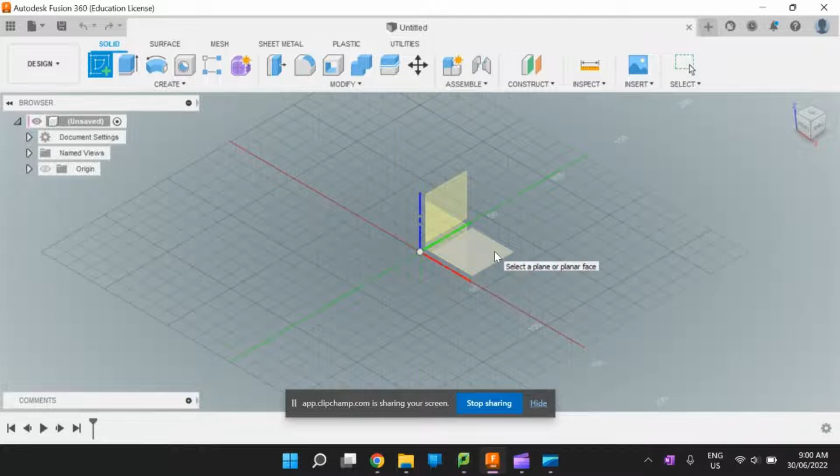The first consideration I need to be aware of is the size of the jigsaw I've made. I'm going to click on the new sketch icon, click on the base plane, bring it into 2D, and make my first piece 100 millimeters high by 160. This gives me the basic shape of my jigsaw puzzle.

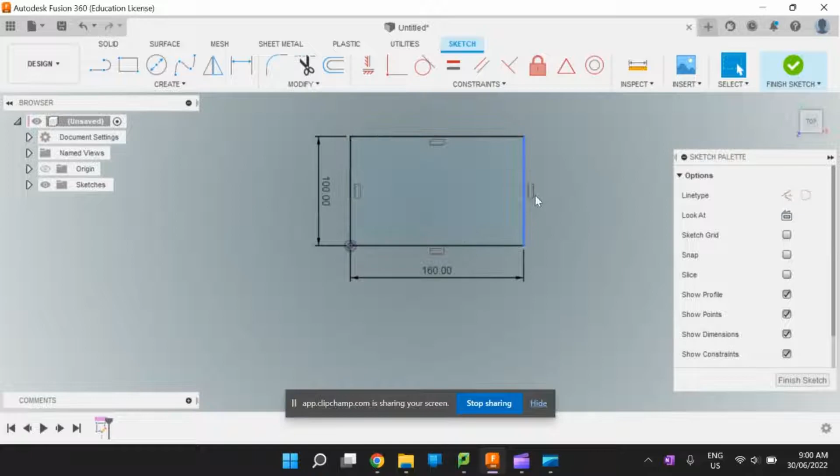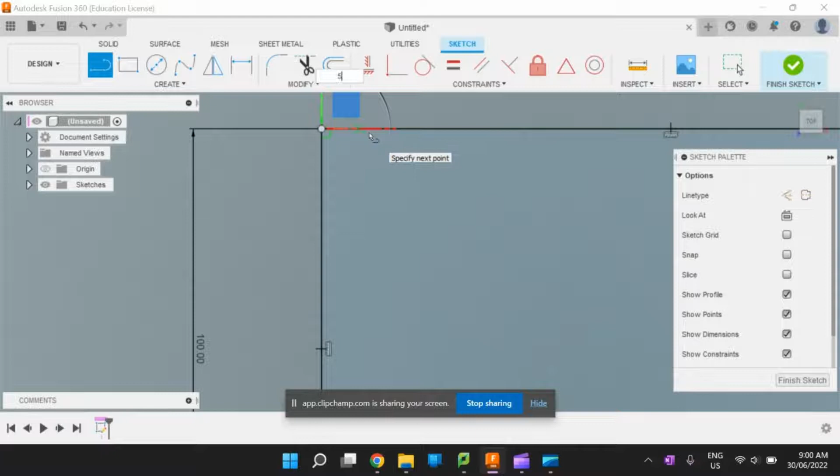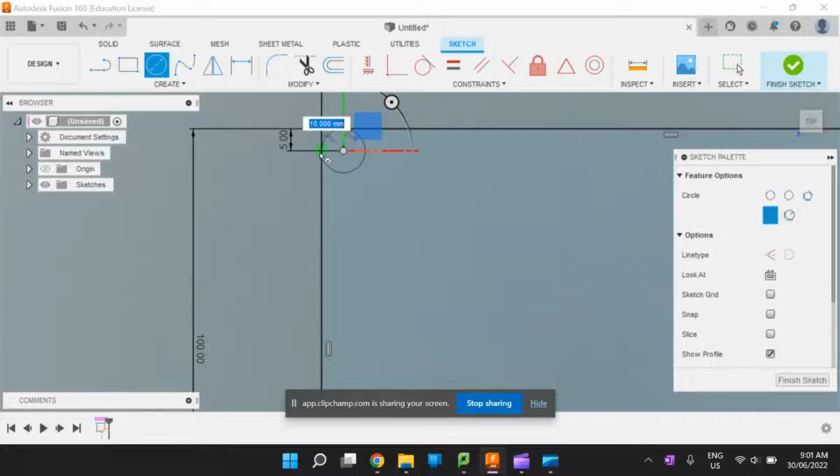If for whatever reason you had a rounded edge, like in the tutorial I showed you where there were rounded edges on the corners, you might want to do a rounded edge as well. I did a 5mm rounded edge, so I'd bring a line in 5, drop another line down 5, and then draw a circle. That should give me the shape I want, as you can see there.

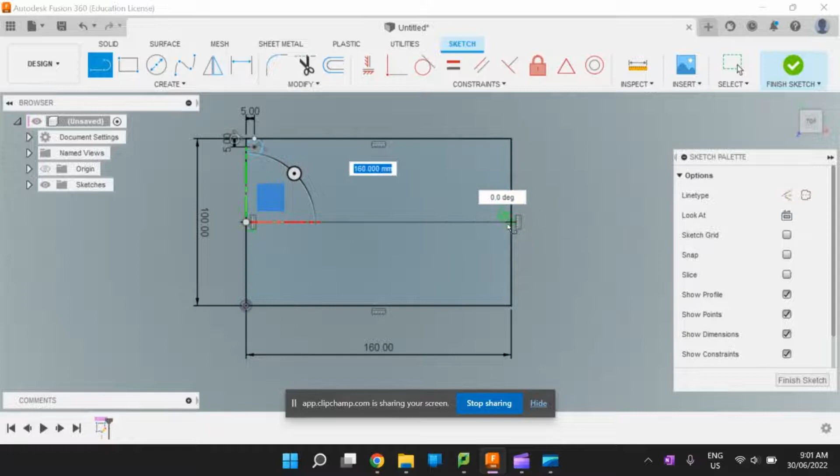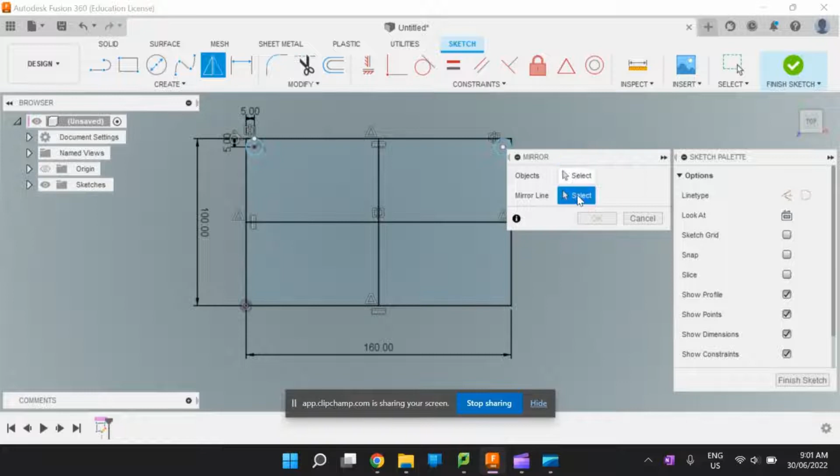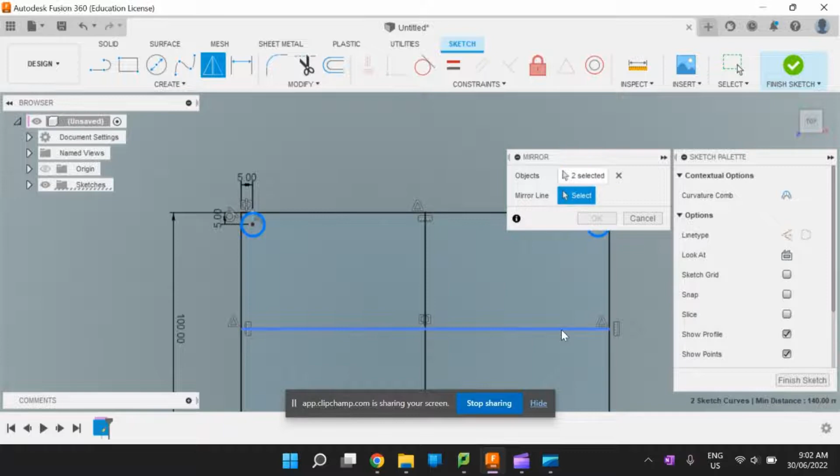To make life easier, I'm also going to mirror that same shape twice. I'll find the midpoint here and draw a line across, then find the midpoint here and draw a line down. Now I select my circle, click the mirror function, click this as my mirror line, click OK. Now with both circles highlighted, I click the mirror function again, select the mirror line, hold shift when highlighting so they go dark blue, and mirror to get 4 circles now. That gives me the basic shape I'm working with for this project.

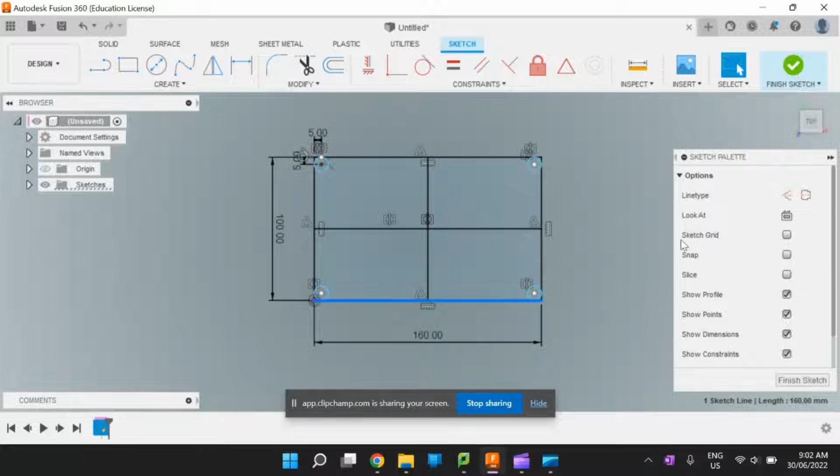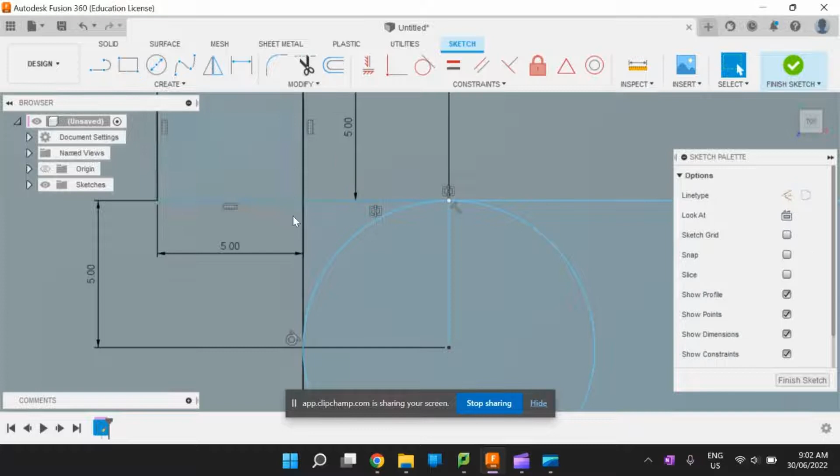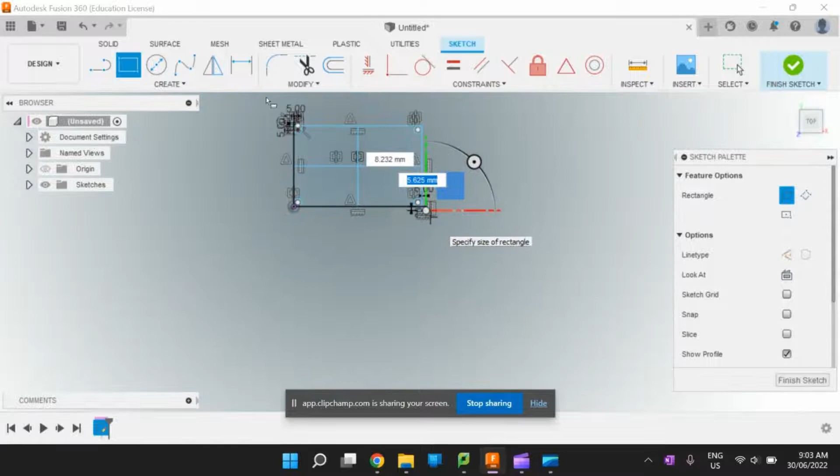Now you might want to tidy up your design. It's not super important, but I'm going to put a border around this shape. I'll delete these dimensions here and just add 5mm to the outside of this shape. The easiest way is to put a small box out there that's 5 by 5, and on the other corner create another small box that's 5 by 5. Just click on that outside corner, zoom out - sorry, it's freezing a little - and click on the outside of that corner too, then both are done.

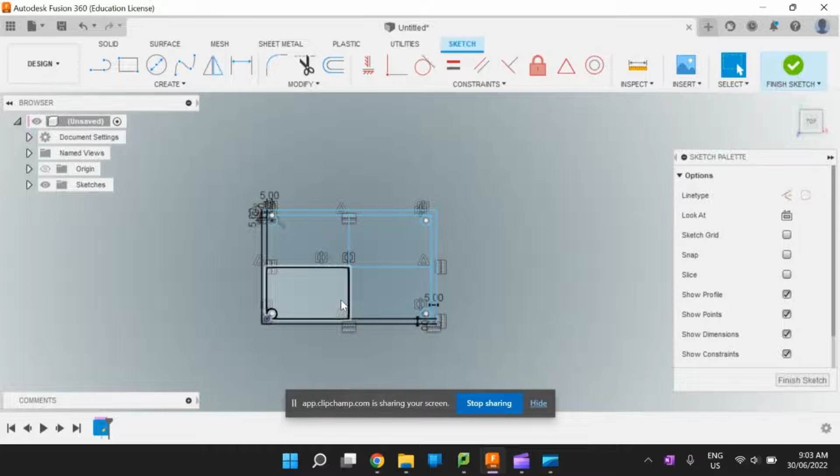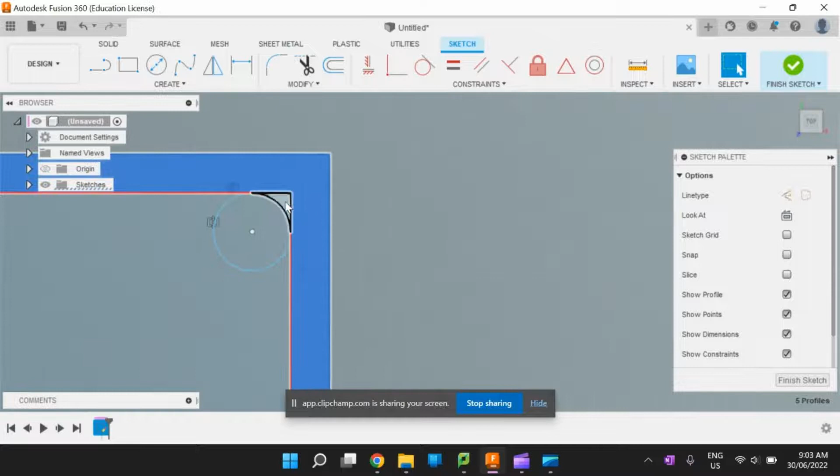Now I'm going to extrude this profile, but I'm going to do an extrusion below the line, and I'll show you what it looks like. I want to click the outside and get all of that shape, including the rounded edges. The only part I'm not highlighting is the shape the jigsaw puzzle is going to fit within. When I do an extrusion now, we'll see in a second what it's going to look like - solid extrude, we want to bring that up.

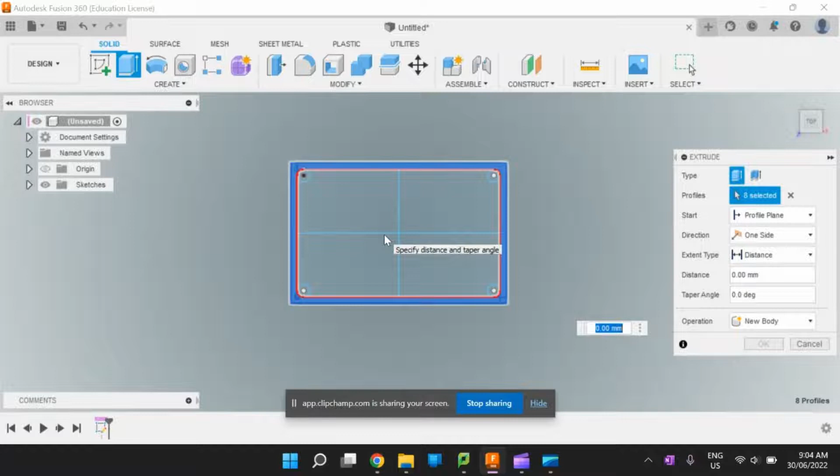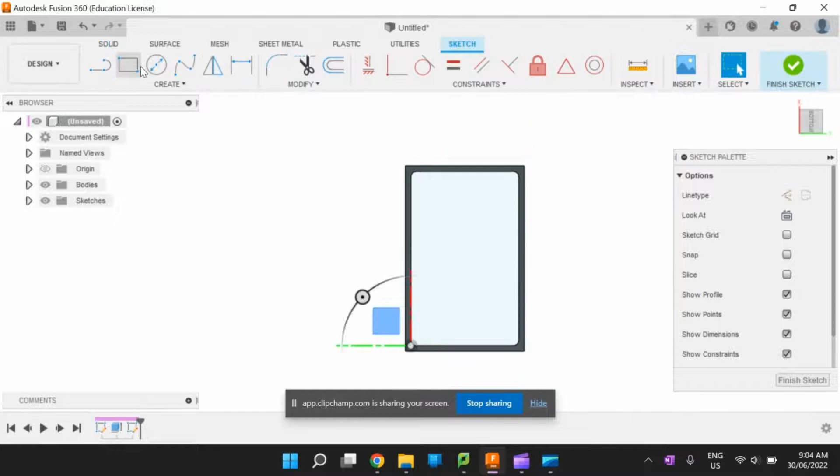The thickness of the timber for the jigsaw puzzle is 3 mil, so let's bring it up 6 millimeters, and then I've got the case like that. I will need to put a base on that, so I'll go underneath it, create a new sketch on this face, get the rectangle tool, and cover the base. Then to extrude that - solid extrude 3 millimeters. Now I've got that shape.

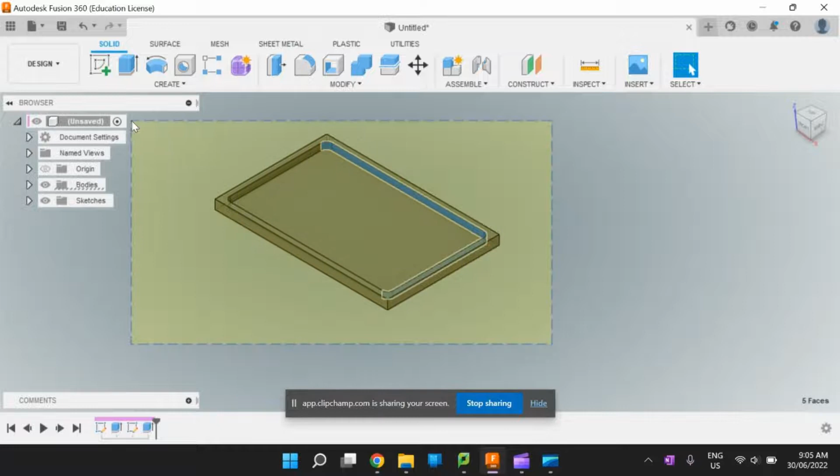I'm also going to highlight everything and move it up 3 mil so that it still sits on the 0 plane. Now I've got a basic shape for my jigsaw puzzle to fit within.

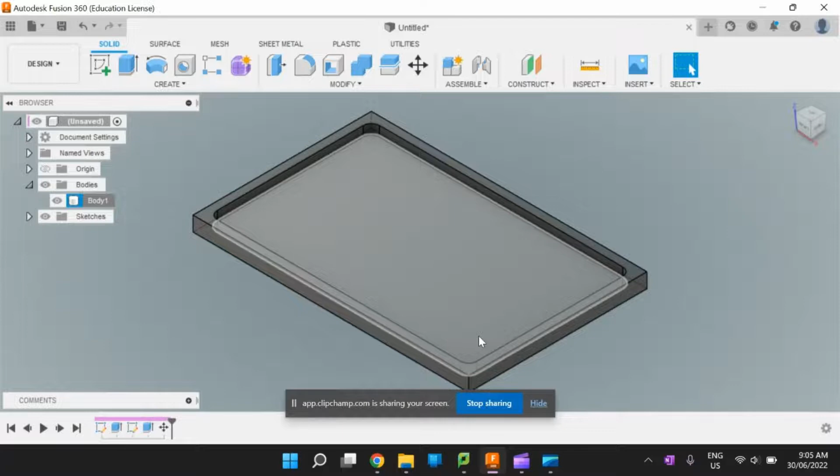The last thing we're going to do is put a little rebate in the top of our jigsaw puzzle so we can put a piece of Perspex over it as a protective coat. If we look at the shape we've got here, we've got a wall that should be 3 millimeters across - it's actually 5 millimeters across, which gives us a little bit of room.

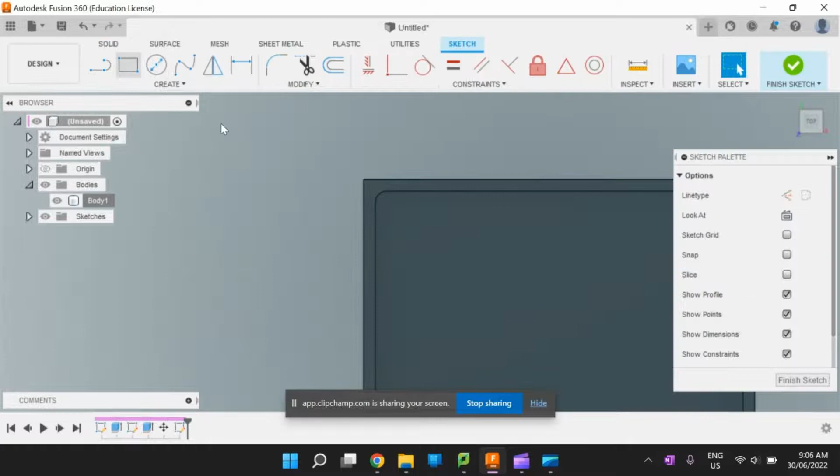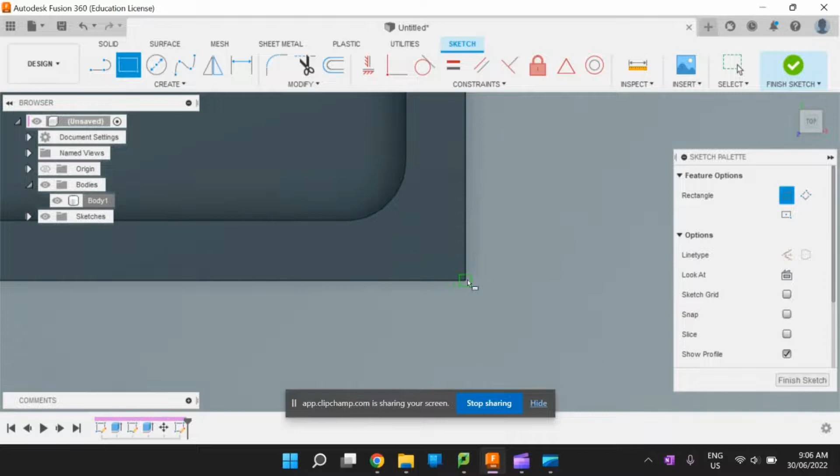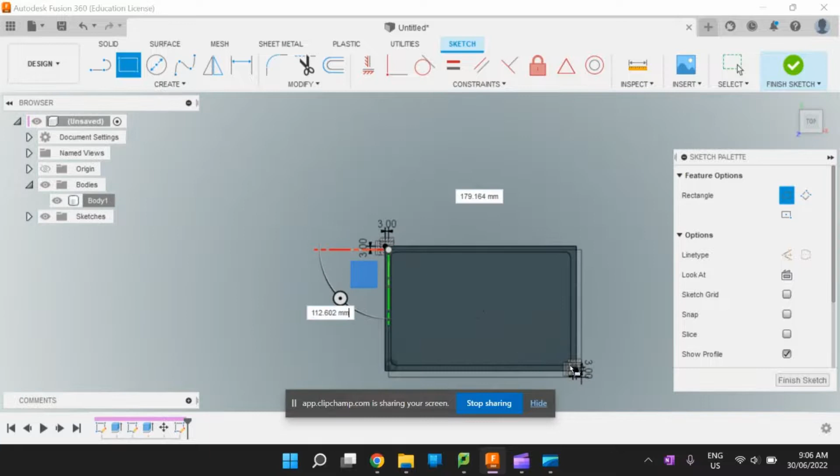So we're going to create a new sketch on this face and put a little square that's 3 millimeters by 3 millimeters. We'll do it on both corners and do the same thing as last time - 3 by 3, using the rectangle tool on the inside corner. It seems to be freezing when I'm doing the rectangle function, but it's snapped on there as well.

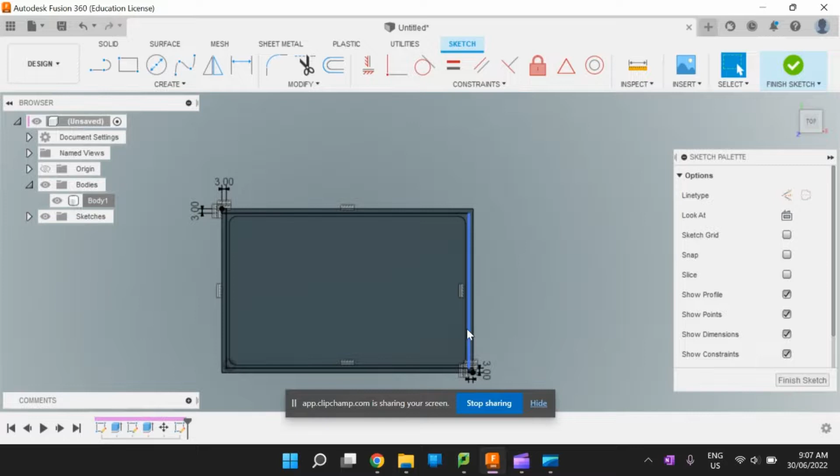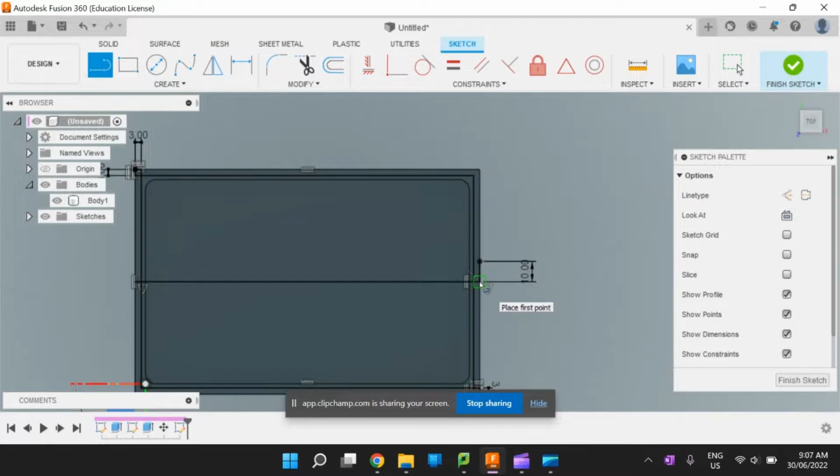Now I've got the shape in there that I can select. However, if I'm going to do a rebate, I'll also need somewhere for my fingers to lift up that piece of plastic from. So I'm going to draw a line from the midpoint all the way across, then lift that line 10 millimeters up and 10 millimeters down, and draw another line.

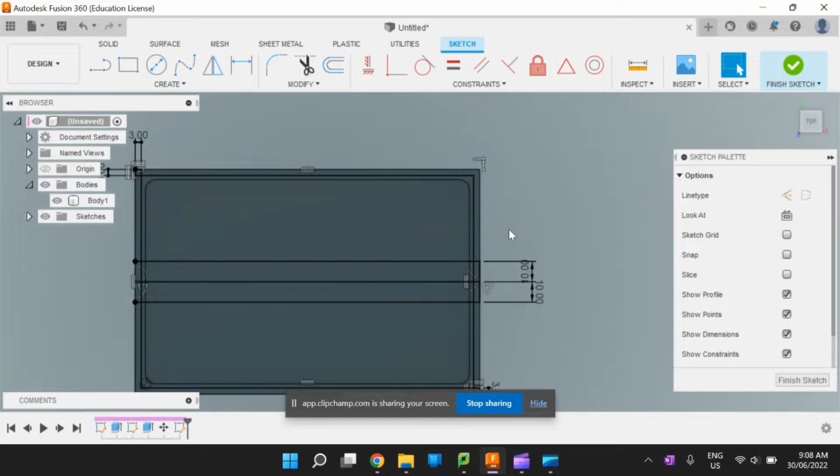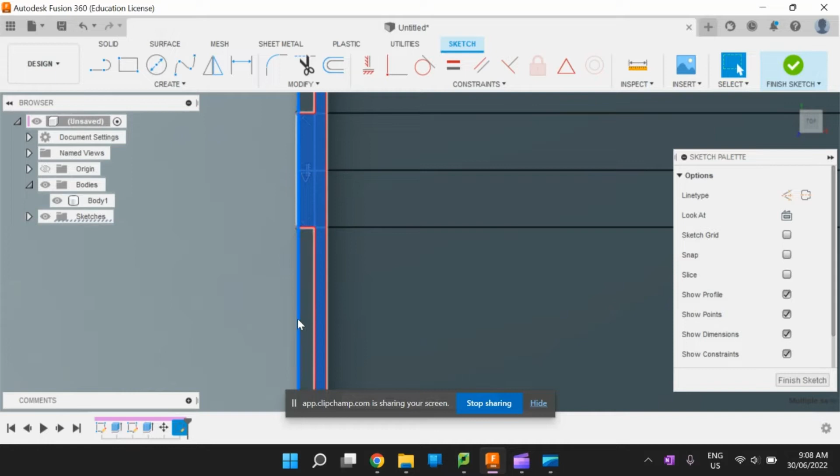Why would we do this? Because when we do our rebate, we're going to cut down the side wall a little bit as well, just so everything will fit in. So now I'm going to select this shape on the inside, click and select these walls here, but also click these two walls on the outside and do the same thing. You want something that looks like that, with everything on the inside for the rebate, plus these two bits here. Then we're going to extrude everything -3 millimeters as well.

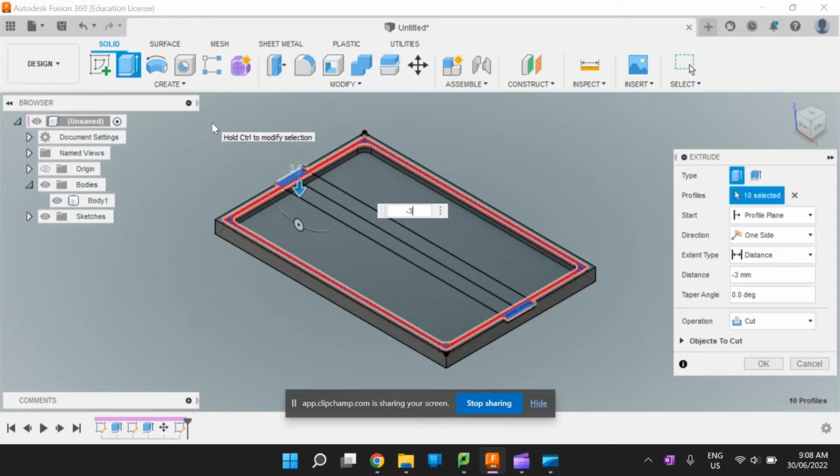What you can see now is that we've got a spot here for the jigsaw puzzle to fit in. We've got a slot in here for our Perspex to sit within, and we've also got a place to put our fingers so we can pull the Perspex off the top of the object if we need to. That is essentially what you're going to have to design and 3D print for this project.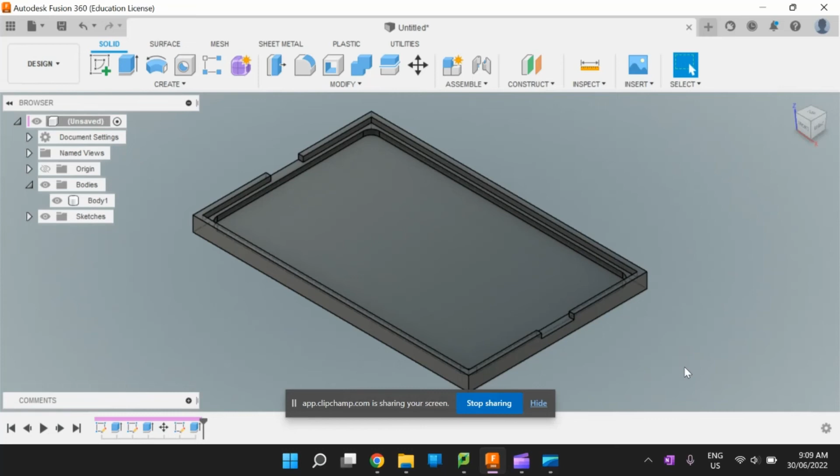Hopefully this video has made a lot of sense for you. It's not a very difficult piece to produce on Fusion, but if you're able to produce it and then print it, it's just another skill you've got in the development of this project. Okay, thanks guys.